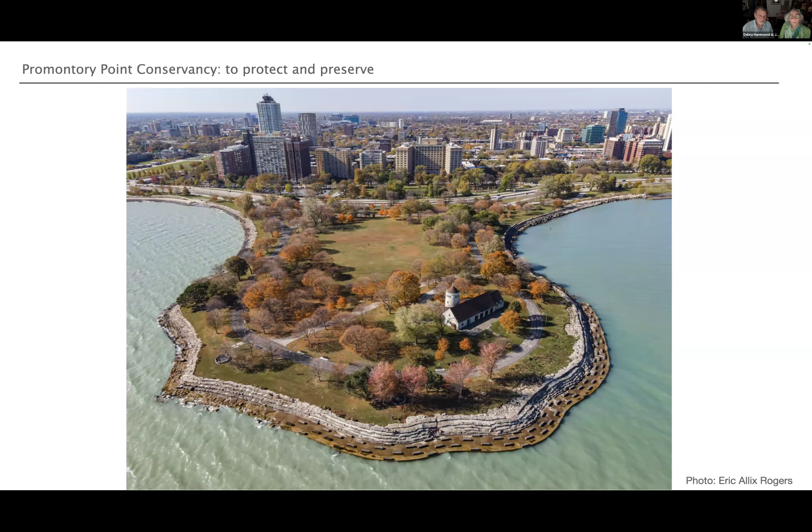Promontory Point extends from East 54th Street to East 56th Street, from South Shore to the water. It's a man-made peninsula, built in the late 1920s. In the late 1930s, what was the Chicago Park District turned it into a park. It's 40 acres, the southernmost point of Burnham Park, a large regional park that extends from Northerly Island all the way to the end of the point.

We're going to be talking about the 3,150 linear feet of limestone block revetment that's along the edge of it. Promontory Point has the last intact stretch of the historic limestone breakwater block, stepstone revetment and promenade that used to be along the entire Chicago lakefront.

It was a WPA project in the 1920s and 30s. This is the last stretch. There's some tumble down parts at La Rabida on the south side and also at Morgan Shoal that are also endangered. But the point maintains its historic significance and integrity.

So some definitions. What is a revetment? A revetment is a very special kind of seawall, built in a way that it absorbs the wave energy as the waves coming across Lake Michigan hit the peninsula. The stepstone shape of the revetment actually absorbs the wave energy and dissipates it, so it protects the land.

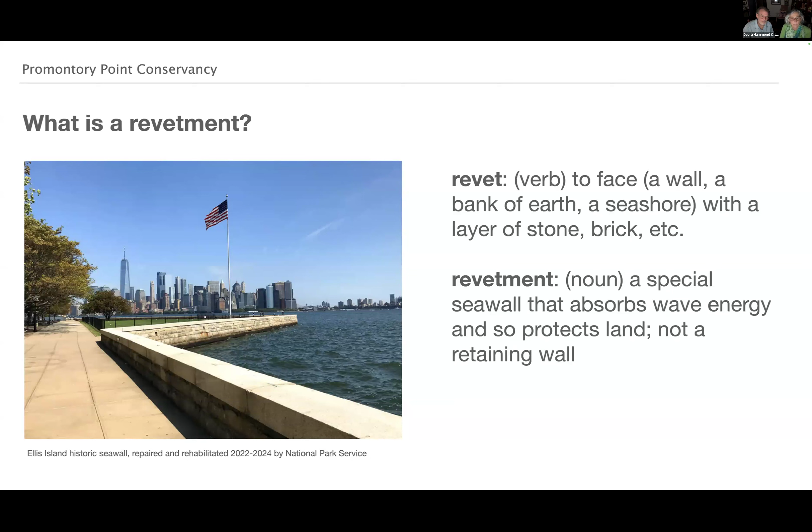So this act has federal regulations. They're still intact as of this moment. The Secretary of the Interior is responsible for the regulations for the National Historic Preservation Act, and there are 4 treatment standards for historic properties. We're going to be looking at one of them, which is rehabilitation. Each of these 4 has about 10 to 15 standards that define what it means to preserve, restore, rehabilitate, or reconstruct a historic property.

So Promontory Point is double landmarked, thanks to Jack Spicer here. There was a crusade by the community to get it on the National Register listing of historic places. The community raised the money to write the nomination report, and with the help of then Alderman Leslie Hairston, we managed to get it through all of the hurdle steps.

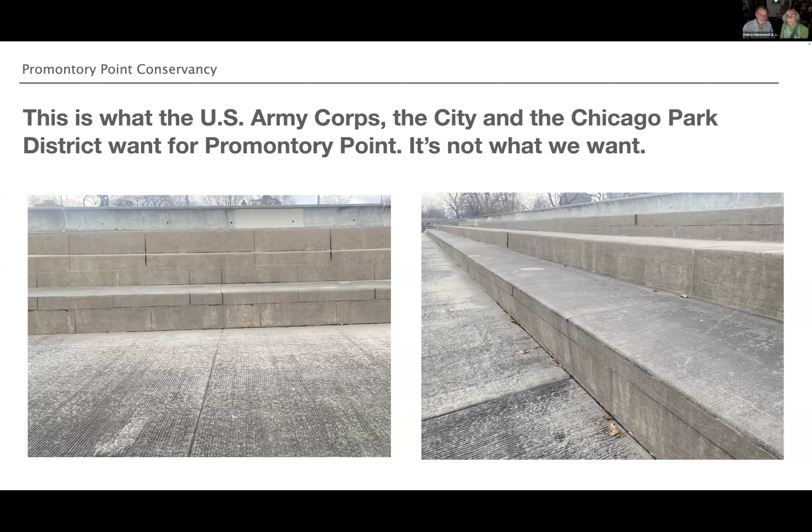We started organizing again and raising money to save the point. Through FOIA and through leaks that we've gotten from the city, we know that CDOT, the Park District, and the Chicago Army Corps intend to demolish the historic limestone revetment at the point and replace it with a concrete structure with limestone cladding on it. So they seem to think that we won't know the difference between the real thing and something with a limestone veneer. Their intention is to replace the existing historic structure with a new structure.

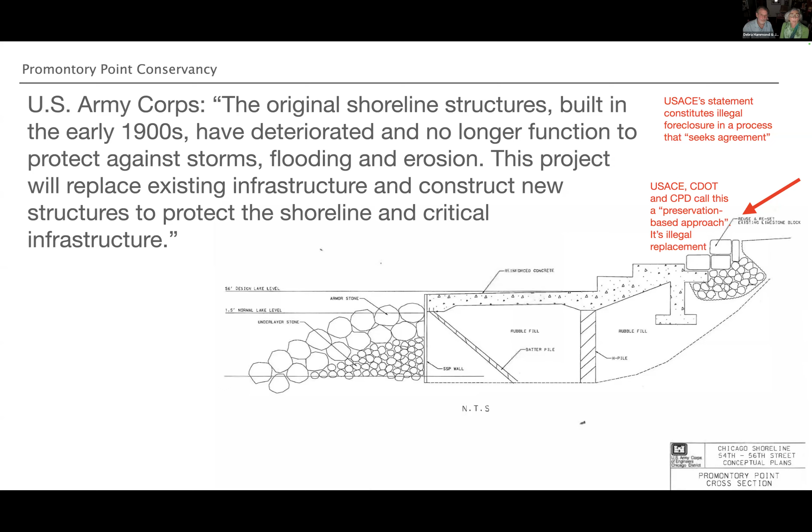Technically, that's illegal because of the landmark protections. It's called illegal foreclosure. They have to go through what's called a Section 106 process as part of the preservation requirements to collect public input and to work with the community to develop a design, and they have to work with the Advisory Council on Historic Preservation in Washington, D.C., and then the State Historic Preservation Office to preserve the historic elements. So they're backing into replacement, demolition and replacement.

As a result, we went about organizing the community, and we raised around $350,000 to hire our own coastal and structural engineers to take a look. We had two questions: What is the condition of the revetment at Promontory Point? Is it beyond preservation and repair? And if not, what kind of engineering methods are available that would also meet the Corps' requirements for storm damage and shoreline protection?

We were really lucky to find McLaren Engineering out of New York. We found them through that Ellis Island project that the National Park Service was doing. They have worked on every inch of Manhattan Island, including FDR Drive and Riverside Park, which means when they've worked either for the Army Corps or with the Army Corps, the Corps has responsibility for all shoreline and gets the permits for any construction. They are also a preferred contractor for the Army Corps' Marine Design Center out of Philadelphia.

So they come really comfortable working with the Corps. Their engineers are also divers. So what they did was a drone aerial survey of the limestone revetment, and then their divers did below water photography, and they created a three-dimensional cloud above water and below water of the entire revetment.

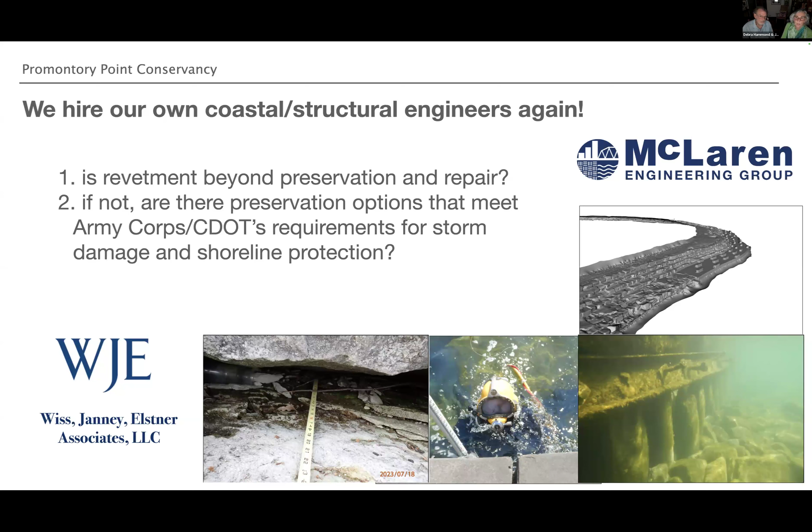Most of the money that we raised came from the community. We did get a grant from the Driehaus Foundation, from the National Trust for Historic Preservation, and from Landmarks Illinois to complete the 4 studies that we're going to talk about.

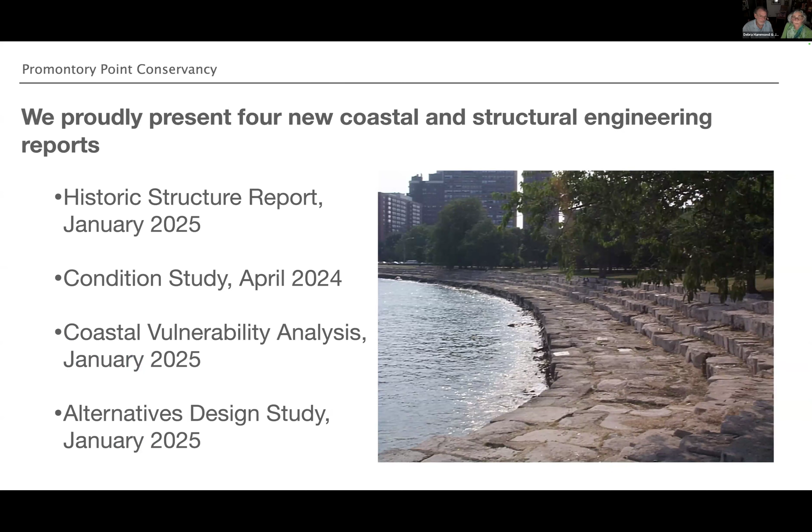So the 4 studies are a historic structures report. This is something that actually the Army Corps ought to have done back when the Chicago Shoreline Project started in the 1980s. This is the first historic structures report that's been done for this project. McLaren did a condition study, a coastal vulnerability analysis, and then an alternatives design study.

So the Historic Structures Report by WJE, it's a pretty important document for historic properties. It's required by the Secretary of the Interior regulations. It serves as a master plan for design and construction planning and decision making. It determines what the SOI treatment standards are going to be, and it does a condition study of the features and then determines their history, their significance, their integrity, and those things guide decisions about how to go about treating the historic structure.

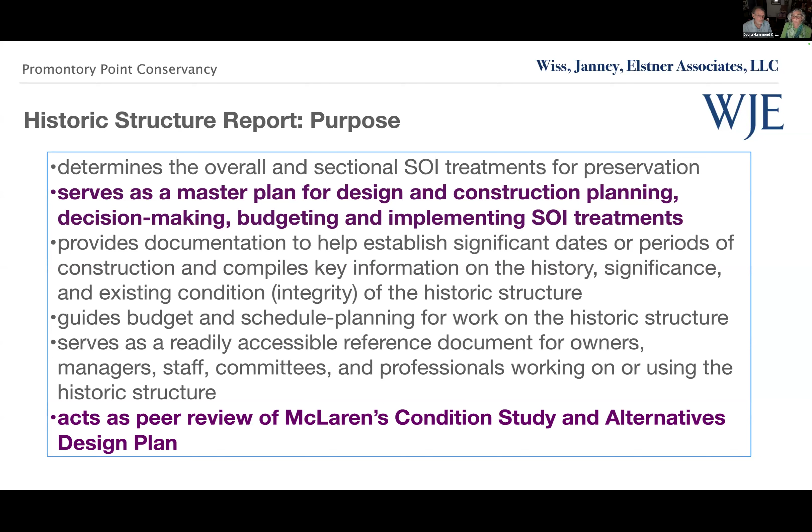What WJE found is, well, we'll see, but in this case, they were also acting as a peer review for McLaren's studies.

WJE found that the historic structure is in good shape, that it functions, it can be retained and repaired, which was corroborating McLaren's findings, and that rehabilitation is the most appropriate Secretary of the Interior treatment, that it can be repaired and fixed while maintaining its historic significance and cultural values.

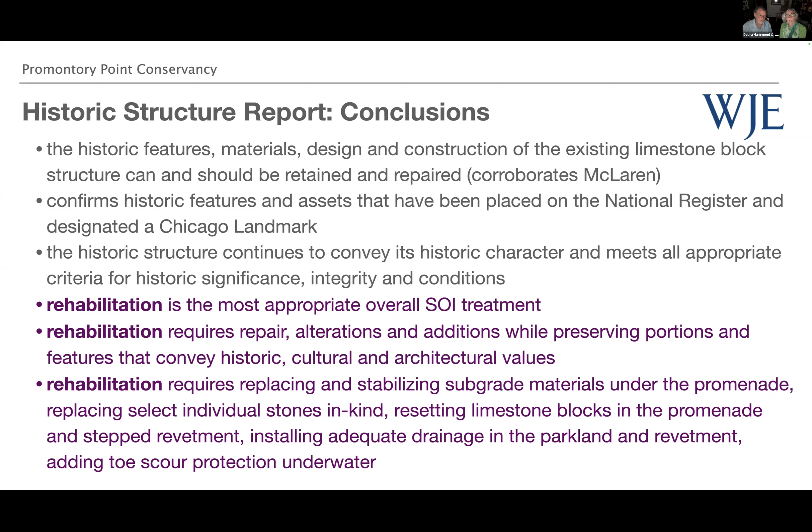It also confirmed that the revetment has not failed, that it functions right now for the purpose of storm damage and shoreline protection, and that the problem is the loss of subgrade material for the promenade platform and inadequate drainage in the parkland. We'll be looking at those in the McLaren reports.

McLaren's condition study found that, in fact, the revetment has not failed. It's functioning. It's serving its purpose of protecting the land, in this case the park, from the waves of Lake Michigan, and that if repaired and maintained it has another 100 years of service.

This park was completed in 1939, so the revetment is 86 years old. Except for one area on the east end, it's had little to no maintenance over that period. McLaren found that there were 6 distinct sections, each with their own condition. On the right side of the map, the light orange represents 1,300 linear feet.

So almost half of the point is in really good shape. That south portion of the point does not get hit by storms. Those storms hit the east and northeast section of the point, and the repairs there are pretty minimal and therefore cost effective.

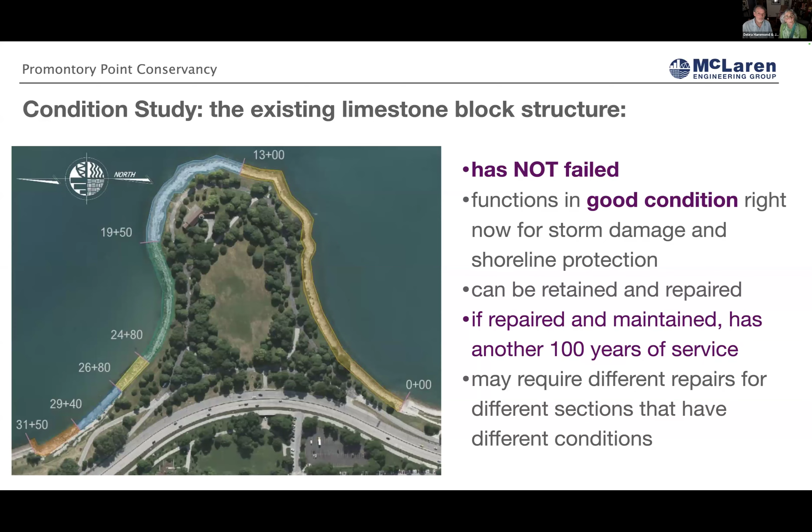The condition study found that there were 6 historic elements for the limestone structure: the upland parkland, the stepped stone revetment — in some places 3 steps, in others 5 — the limestone promenade, which is the platform portion, and underneath that, the promenade subgrade.

Chicago was actually a pioneer in lakefront structures for cities in the United States in the 20s and 30s with this design. The crib structure was how it was historically built. And then last is the toe scour protection — that's the part actually in the lake protecting the outer edge of the revetment from waves, and it has an important function.

McLaren's study found that the limestone revetment has not failed. There's no failure of the structure. There are two problems: lack of adequate parkland drainage — when water pools in the park, it doesn't have a route to get back into the lake, and it's eroding down through the underpinnings of the revetment itself.

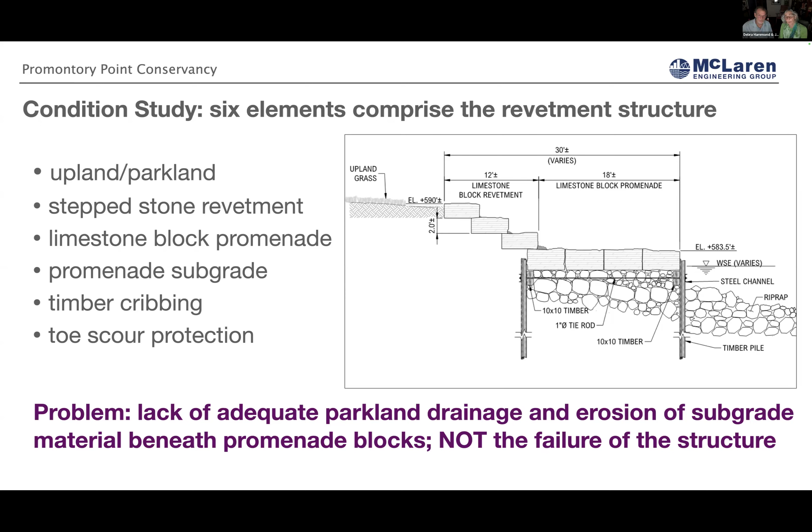And then the subgrade material under the promenade has been washed out by waves, most particularly on the north edge of the point.

McLaren also did — their coastal engineers, not their structural engineers — a coastal vulnerability analysis. They took the criteria that are publicly available from the Army Corps. Through FOIA, we were able to get what the Chicago Department of Transportation, CDOT, used for its RFP for its engineering company, which had already hired an engineering firm to do a $5 million design study of Promontory Point. We were able to FOIA that, and we provided those criteria to our engineers.

McLaren has a lot of experience working on waterfront structures, so they included additional engineering standards and practices. They evaluated the structure based on a standard set of criteria and wave design. What you see on the right is one of the simulated tests that they ran.

The Corps and CDOT are using an extreme non-historic wave of 7.3 feet above average. McLaren used an 8.1 foot wave. So what you see is that the existing limestone revetment, with an 8.1 foot above average water level wave, is hitting just slightly above the second tier of the steps. It is not overtopping the structure.

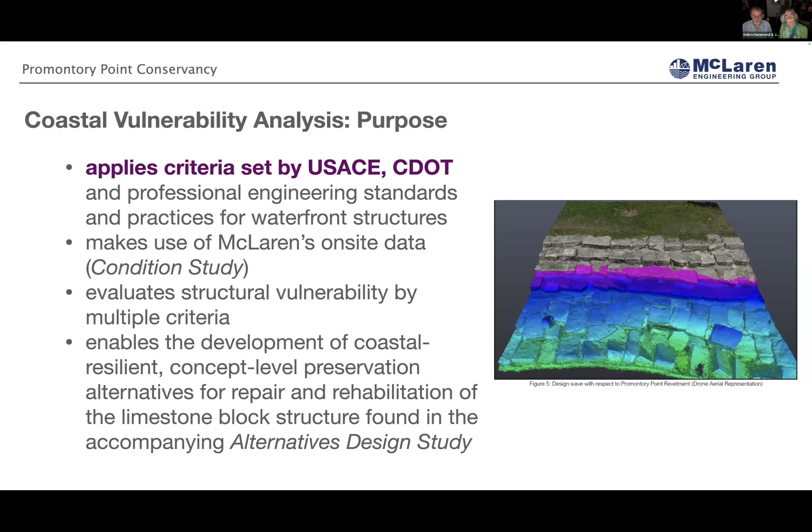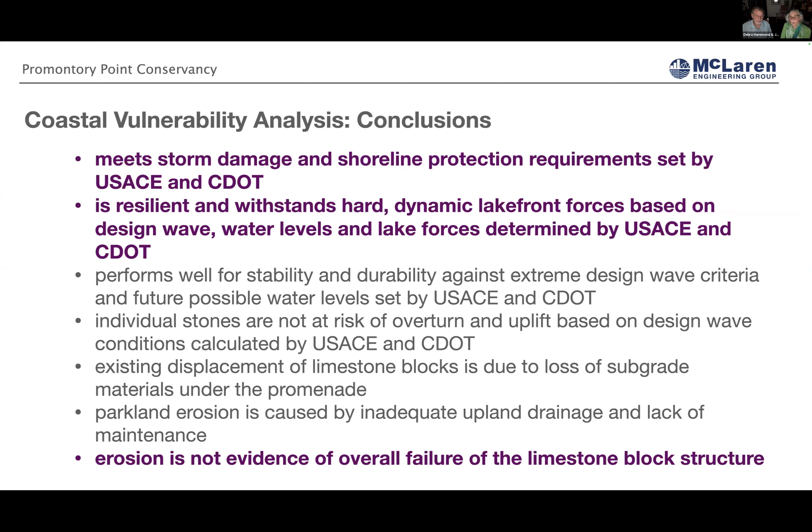So this was an important part of the study, because out of this come the alternative designs that McLaren proposes for fixing the revetment. The coastal vulnerability analysis finds that the revetment right now meets storm damage and shoreline protection requirements just fine. It's resilient and performing, stable and durable under extreme design wave criteria, and erosion is not evidence of overall failure of the limestone block structure.

Using those findings in the condition study, McLaren went on to do an alternative design study. Because of the different sections with different conditions, they came up with 5 different possible preservation alternatives that preserve the historic character of the limestone revetment and met the Army Corps and CDOT's requirements for coastal resilience. We're not pitching a competitive plan to their demolition and replacement with new construction. We are showing that there are multiple ways the limestone revetment can cost-effectively be fixed.

What the table shows is that for different alternatives, they apply to different sections, as shown in the map with the different colored sections. If you see section 1, which is 1,300 linear feet, almost half of the point, you can see there are very cost-effective ways of repairing that, with a cost per linear foot as low as $13,700, whereas the Corps CDOT cost per linear foot is $31,746.

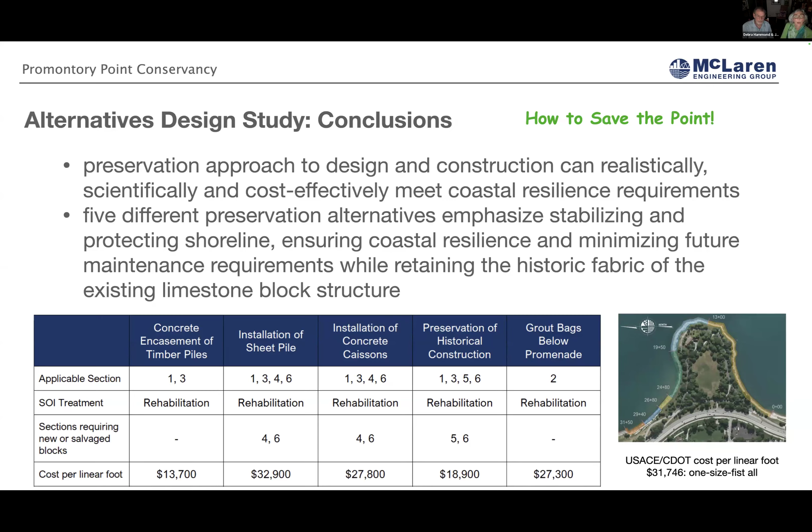The alternative design study also found that if you repair it in sections, it'll take 11 months. This makes a lot of sense. To demolish it, you have to pull the whole thing apart. In the past, what they've done is grind these 8,000-pound blocks into rubble, then truck the rubble out. That's a huge cost and time commitment, but then they have to build a new structure out of concrete and whatever else they're going to do with limestone cladding.

All of the materials to repair it are already in place at the point, so you don't have any of these time-consuming activities, and you don't have the cost. Repairing it will take 11 months and keeps as much as 80% of the park open to the public at any one time, whereas the Corps CDOT plan closes the whole park for 5 years.

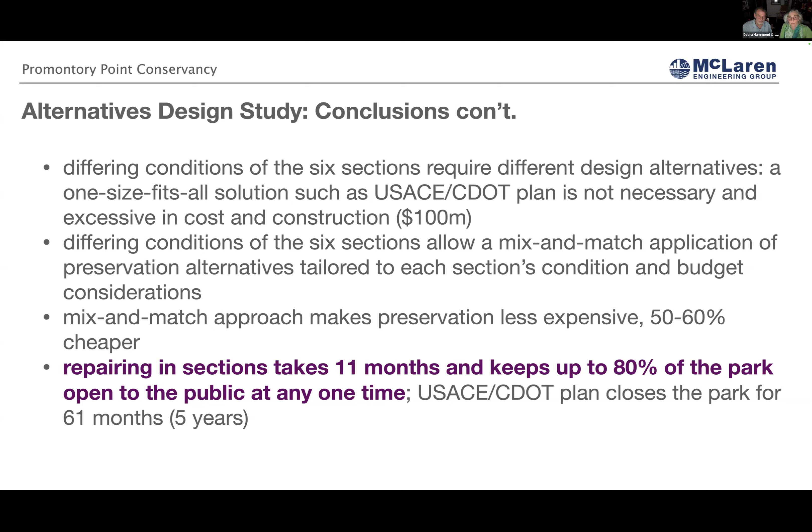These multiple options can also be adapted for universal access or ADA compliance. Our alternative designs include universal access designs at 3 locations. We worked with Frank Heitzman, who wrote the state ADA guidelines. He's a historic architect, and Frank worked with McLaren to come up with these universal access designs using a 1-inch per 20-inch distance, a very gentle ramp that would work for everybody, for people in wheelchairs, but also for kids and people with strollers.

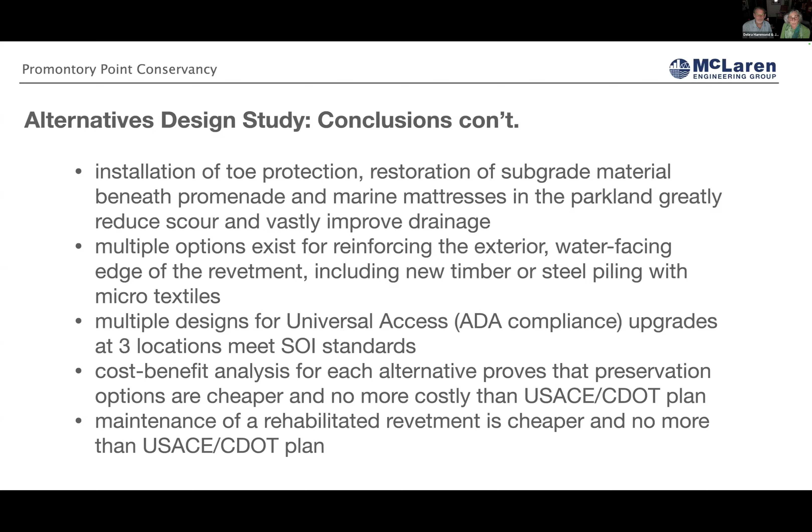McLaren completed a cost-benefit analysis that showed that using preservation alternatives, it's significantly cheaper, 50 to 60% less, and the same for maintenance. The maintenance for the lifespan of a concrete revetment is 40 years. So we're looking at 86 years right now, and McLaren says that if you repaired it and put in some of these new materials, you could get another 100 years of durability out of it.

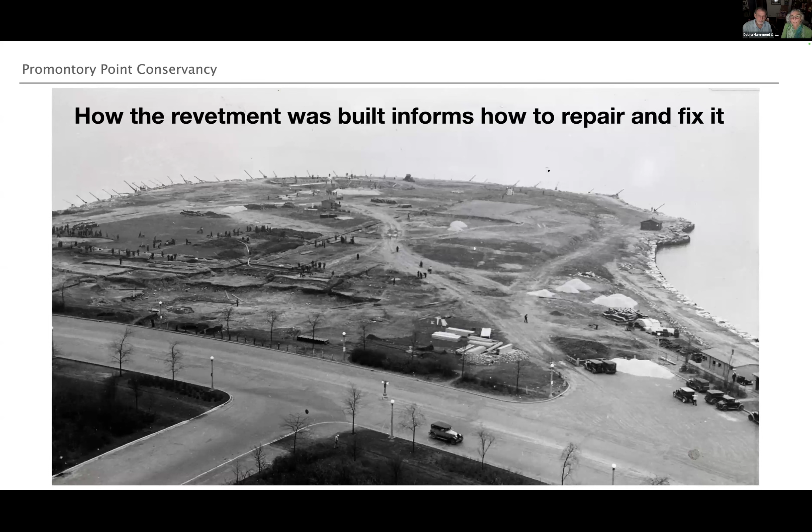So let's look at some of the elements and some of the technology and repairs that McLaren and WJE looked at. For the Parkland Upland, on the left, you can see this is the east end at the Coffins. This is where erosion - water has, the spray from waves has overtopped the revetment.

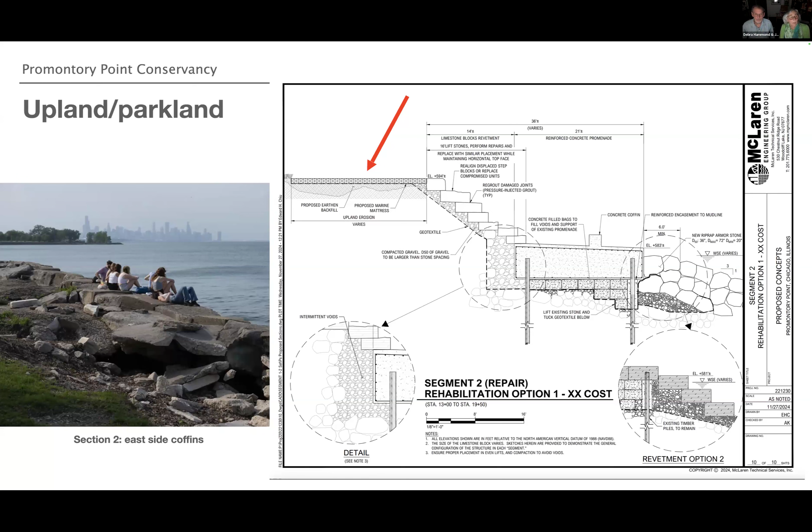And has pooled, and as it's drained out back into Lake Michigan, it's taken out the earthen backfill. So McLaren is proposing using marine mattresses that would help with the drainage, putting in geotextiles that would allow the water to drain back out into Lake Michigan without destroying the underpinnings of the structure. These are pretty tried and true materials that are now being used all over the world for lakefront structures.

Apparently, these have been really successful at the Panama Canal. So here we're looking at the far north end of Promontory Point. Sometime in the 1980s, the Corps and the city put rubble mound on top of the revetment there. The structure is still intact there, so these stones just need to be removed and the revetment repaired. But in this case, we're looking at the step stones, so they just need to be reset.

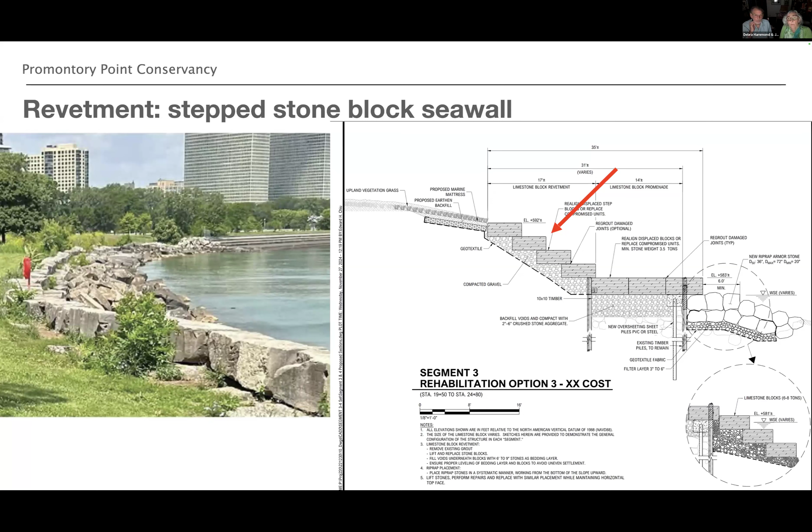Where there's erosion damage from the overtopping spray, put in new fill and the geotextiles. This is a look at where the north end of the point meets the concrete coffins on the east end. So we're not sure if the joining of the two materials is what exacerbates the damage here, but this is an instance where waves over time have washed out the fill underneath the promenade and the blocks have settled.

There's no damage to people from this. It's not overtop. These blocks are not being uplifted or overturned by waves. It's just that as the material beneath them has been washed out, they've just settled. So here's a more high cost option with these caissons underneath the promenade. They're like giant cinder blocks and filled with rubble. It just adds more stability, more durability over time.

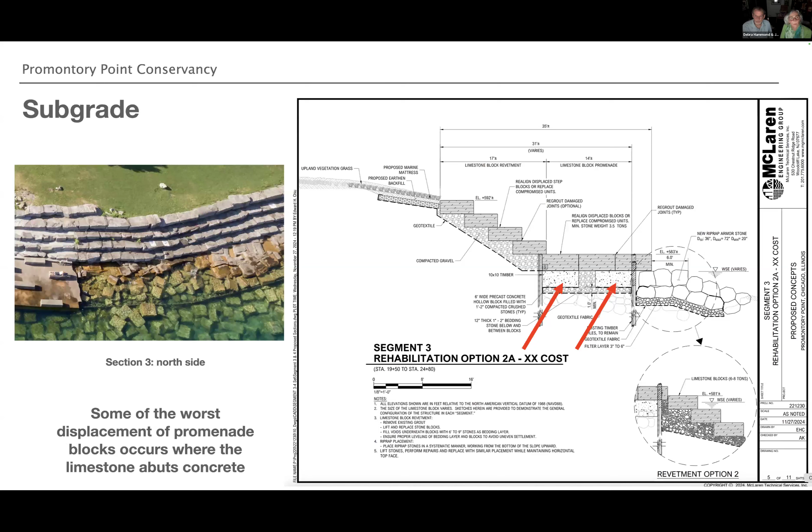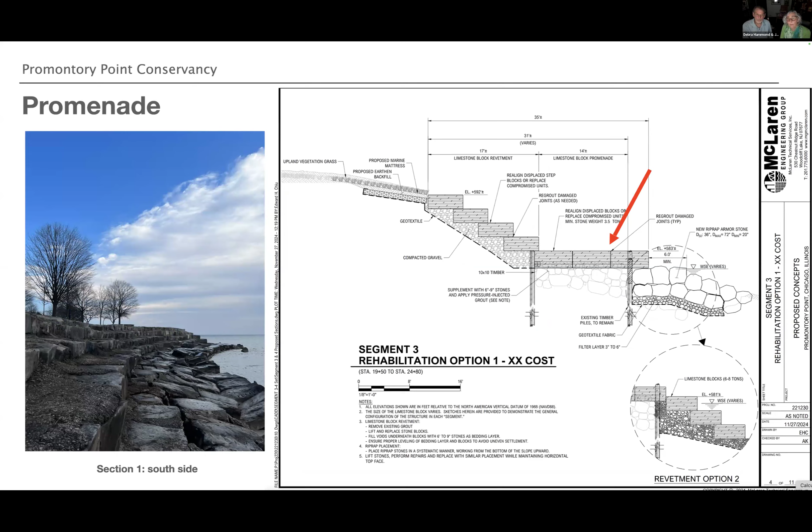Another tried and true, pretty common lakefront technique for structures like this. The promenade itself, so here we're looking at the south end of the point. All that needs to happen here is the new fill, new gravel needs to be put in, packed in underneath the promenade, and the stones reset. Pretty economical, not very expensive in the scheme of things.

So the timber cribbing is part of the historic structure also, has the historic significance because of the fact that Chicago was really a pioneering waterfront city, and this was a really successful design copied by other cities. So the crib really no longer serves a function. It stopped serving a function once the revetment itself was built, but there's no reason to destroy the whole thing just to remove the crib structure. In fact, it could be used for other strengthening things if there was budget for it.

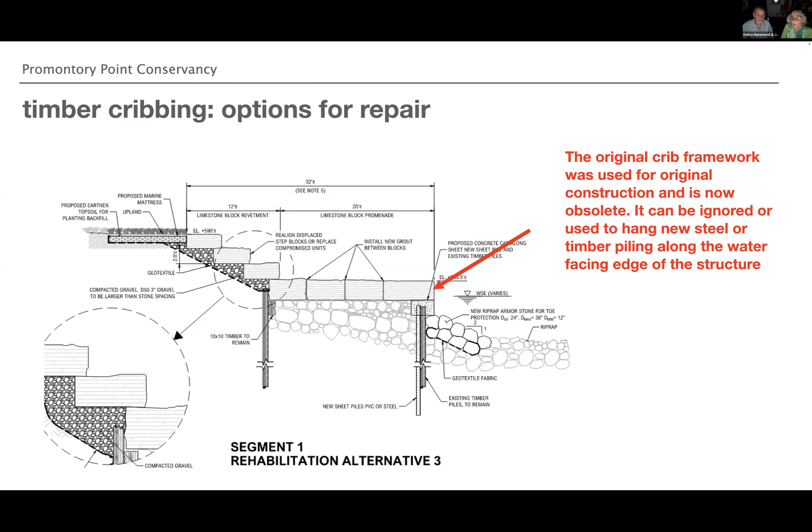So in this case, the timber cribbing has a concrete cap on it at the water facing edge to just reinforce that edge that's upholding the outer stone on the promenade. You could also, the timber cribbing is on a steel structure that's still intact and still there, so you could roll a steel sheet piling along it. It could be used structurally quite easily in any repair.

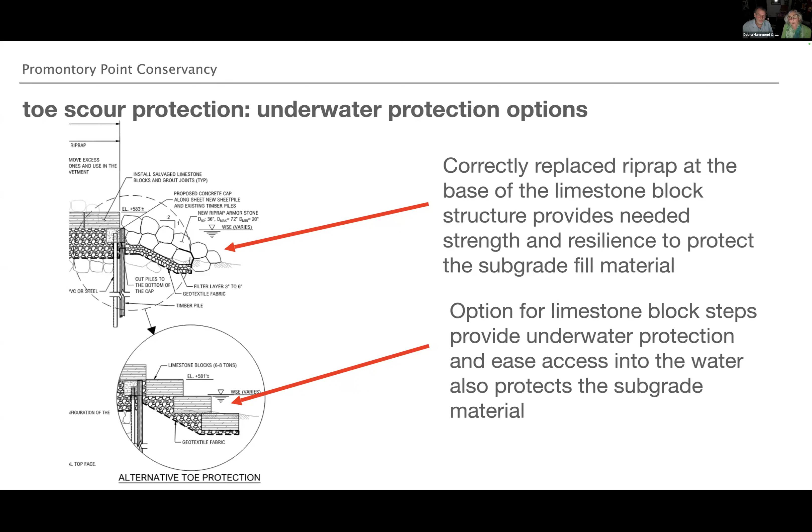So toe scour protection turns out to be probably the thing that's eroded the most over time. It's just that it's not very visible because it's under the water. It plays a really significant role in mitigating wave energy and dissipating wave energy before it hits the land. So the shape of it is important. Here you see a couple of options that would work to really reinforce and keep that fill stable underneath the promenade while breaking the force of the waves.

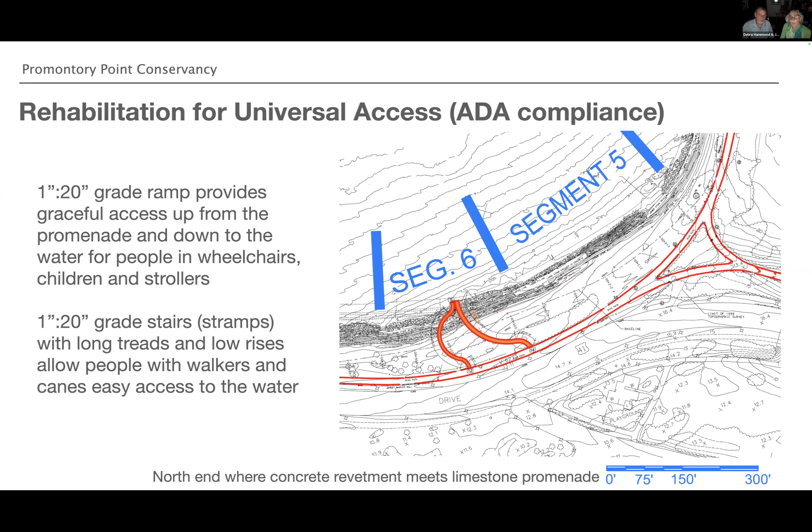As I mentioned, the Secretary of the Interior standards of rehabilitation allows for adaptation for universal access. This is a drawing of the north end of Promontory Point, where the limestone revetment connects with a concrete revetment that the city built back in 1999. So getting people up and down easily to the waterfront and into the water is the goal here.

It's over 5 feet thick. It's stable. It's not going anywhere. It has an erosion cavity that can easily be filled. It would be astronomical to destroy it and just dismantle it. It's a concrete platform, so why not just put ADA ramps down to it so that people in wheelchairs can get down to the water and get down into the water.

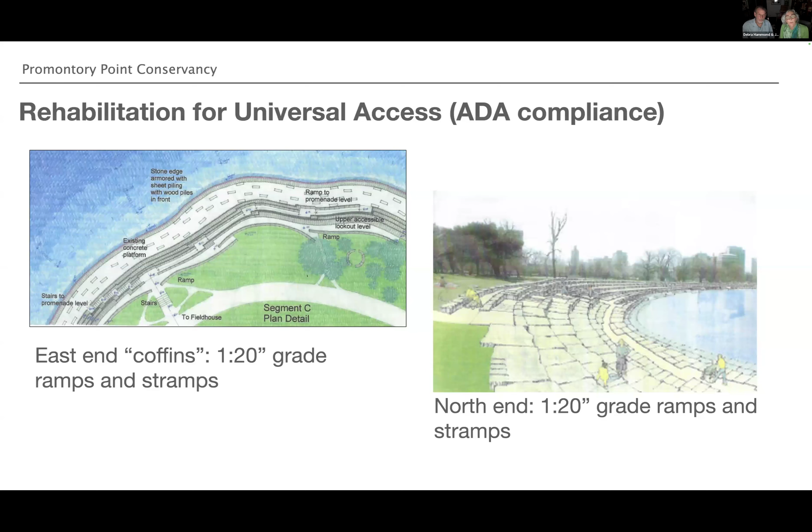So taking advantage of what's already there, what's part of the community culture. I mean, just the fact that everybody knows it as the coffins. They're not coffins, they're wave deflectors, these little block things on there. So our studies in conclusion show that the existing limestone block structure has not failed.

It functions in good condition right now for the purposes that it was intended, coastal resilience. It can be retained, repaired, and rehabilitated per the preservation standards, and to meet the Army Corps and CDOT requirements for storm damage and shoreline protection. There are at least 5 ways that we know of that it can be fixed, and there could be even more.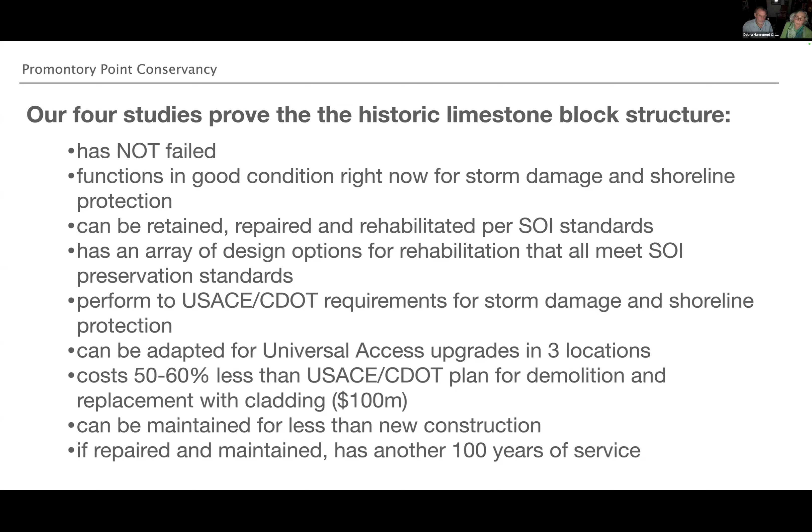The point being that there's an array of ways it can be fixed rather than destroyed, and the cost is 50 to 60% less than the one-size-fits-all demolition and replacement. Maintaining it is also less than new construction. So our approach is the only one to date that actually marries storm damage and shoreline protection requirements with the Secretary of the Interior preservation standards. In addition, it's cheaper, and it's what the community overwhelmingly wants.

Right now we're running a survey. You have to be at the point to take the survey, but the results are pretty amazing. One of them shows that 99.7% of the community thinks the revetment should be retained and repaired. We've had close to 500 responses already, so we're statistically valid so far. You don't see that kind of unanimity in our society very often, but it's clear that the people who go to the point all year long really love it.

It's part of their life, their mental health, their physical health, it's part of their community. It's a really extraordinarily unique place. I think it represents a lot of what we say we want to be in terms of inclusion and safety, beauty and peacefulness. So preserving the historic limestone block structure also preserves the community that's gathered at the point for nearly 100 years.

And that's our presentation. We're happy to take questions. Thank you very much.